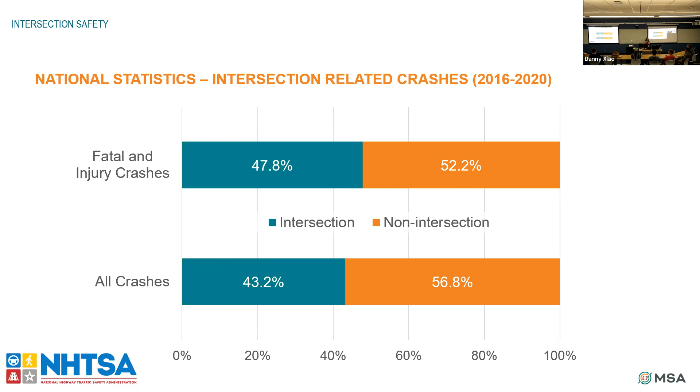A few more national statistics here. We have intersection-related crashes. So about 50% of the crashes that we experience across the nation, this is from 2016 to 2020, are fatal and injury crashes occurring at intersections. And just under 50% of all crashes that happen in the US are intersection-related. So being able to improve our intersections is a great way to reduce those fatal crashes.

Taking a brief look at traffic signals, on average, over 10,000 people are killed or injured at traffic signals each year. And there was a AAA report completed relatively recently that analyzed red light running at traffic signals in particular. In 2017, they identified 939 people that were killed across the nation just related to red light running. So you can see that that's one of the major issues with a traffic signal and why we look to try to install roundabouts when we can. The AAA is highly supportive of roundabouts because of their proven safety.

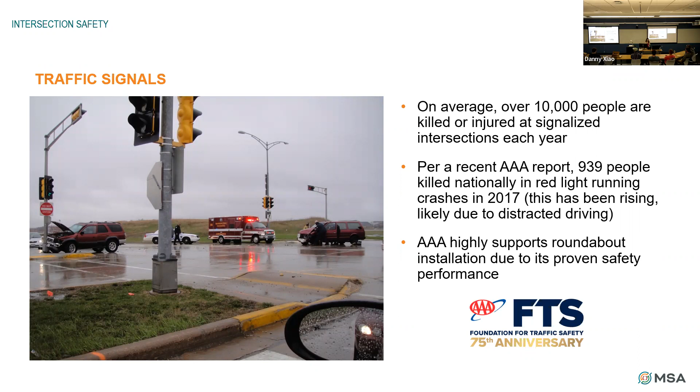So taking a look at how roundabouts are able to reduce crashes across the US. In 2001, there was a study by the IIHS, one of the original crash reduction studies for roundabouts within the nation. That study identified that crashes overall were decreased about 39% when an intersection that was previously stop controlled or traffic signal controlled was replaced with a roundabout. And similarly, fatal crashes reduced 90% at intersections that were converted to roundabouts. So those are really impressive results, and that's really what led the push to install roundabouts across our communities today.

Wisconsin is a national leader in roundabout installation. If you've spent any time driving around Wisconsin, I see some heads nodding, you've probably run into roundabouts, especially in the Green Bay area. I was driving around there not that long ago, and I felt like everywhere I was going through a roundabout, and that was really exciting to me.

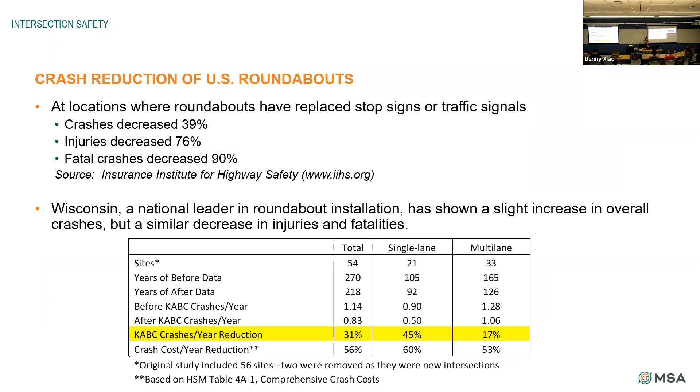So we've been studying our roundabouts for a long time in Wisconsin, and a recent study looked at the reduction of KABC crashes, so that's your fatal and your injury crashes. ABC are just the different severities of those injury crashes. Of the 54 sites studied in this table on the screen, overall crashes reduced by 31%. For single lane roundabouts, those were reduced by 45%. So we are seeing similar results to what that national study in 2001 was reporting, and roundabouts continue to reduce those crashes.

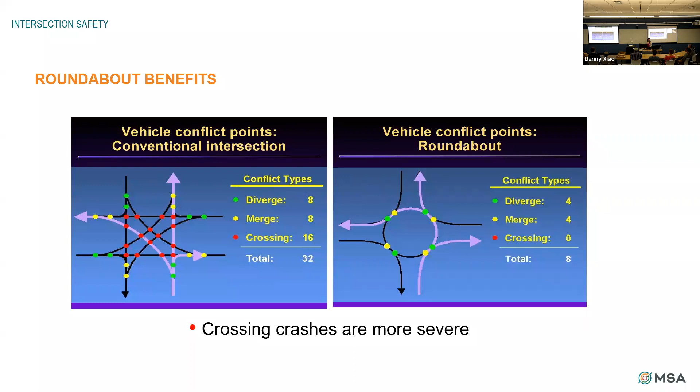So some of the benefits of roundabouts: they are the safest type of at-grade intersection. I mentioned the side swipe crashes; the angle of conflict between the traffic that's circulating and the traffic that's entering is a side swipe that's less severe. You have a little slower speed at roundabouts, just the physical geometry of a roundabout, the splitter island or median as you're approaching the intersection and the central island in the middle that directs drivers and forces them into certain patterns, and it requires them to slow down in order to negotiate those curves.

You also have simplified decision-making at a roundabout. So when you come up to the entry, all you need to do is look to the left to determine whether or not it is safe to enter the intersection. And that's in contrast to a lot of other types of intersections where you need to look across the intersection and to your right, make sure that nobody else is coming. All you need to do at a roundabout is look to your left.

They have very high capacity, often very similar to traffic signal intersections, sometimes even more capacity than traffic signals in some situations. They're also suitable for areas where you have a lot of high traffic or low traffic, especially intersections that have fluctuating flows. So say like next to a school, where you have really high peak periods in the morning when all the kids are coming to school, and then in the afternoon when all the kids are getting out of school. A roundabout can do a really good job of accommodating those high flows during those peak times.

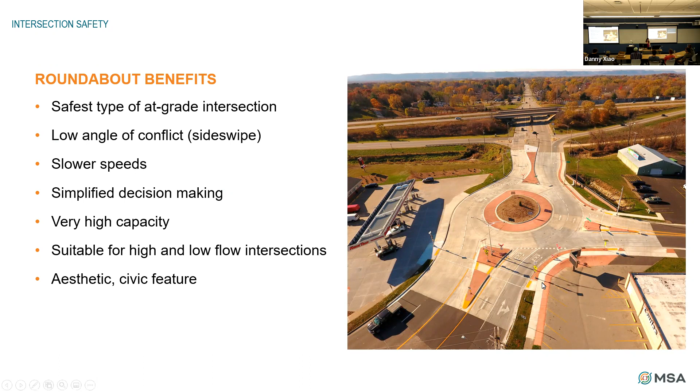All right, so a little bit about what a modern roundabout is and what it isn't, and a history lesson. So isn't a roundabout just another traffic circle? Well, as I listen to my Google Maps telling me how to get here today, even though I know how, I just have it on just in case, I go through a roundabout and it says, as you approach the traffic circle, take the second exit. No, it's not a traffic circle, it's a roundabout. So I'd like for you to all know that a roundabout is a type of circular intersection, but a roundabout is not a traffic circle.

So we have other types of circular intersections. You may have heard of traffic circles or rotaries, or neighborhood traffic circles. We'll talk a little bit more about traffic circles and rotaries in the next few slides. A neighborhood traffic circle, you might have seen in a residential community where they just pop a circle in the middle of one of the intersections, but it doesn't have a lot of the features of a roundabout.

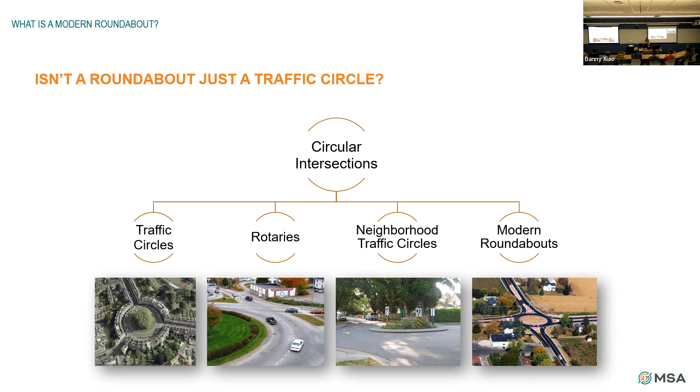So traffic circles. Traffic circles are large. They were often developed as a civic feature, something to have in the central island to represent the community and attract people into the central island to take a look at what's going on in there. It's really a ring of a series of intersections, a circle with a bunch of intersections around it. And when you enter the circle, you're facing the central island perpendicular to the circle. It's basically a right angle, and then you wait for a gap in order to enter. The series of intersections around that circle might be yield controlled, they might be stop controlled; it varies depending on location.

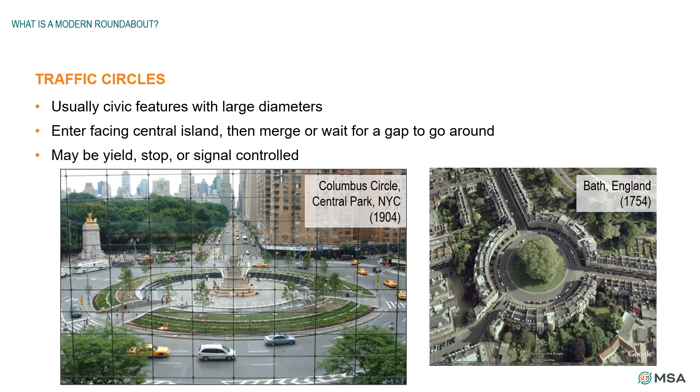But these have been around for a really long time. So I have two examples on the screen here. Columbus Circle is by Central Park in New York City. The configuration that it's in right now was introduced in 1904. The concept for it was actually even older than that. And then there's an example from Bath, England from the 1700s. So these have been around for a long time, and we've progressed since then.

So in the early 1900s, the US didn't have yield signs. That wasn't invented yet. So when you came up to an uncontrolled intersection, it was first in. So whoever gets there first is the one that wins, and the other people then just have to wait for that. And you can imagine that that would get pretty chaotic pretty quickly.

So shortly after that, they introduced the yield to right law. And this is something that you probably encountered in driver's ed, where if you come up to an intersection at the same time as somebody else, you yield to the person that's on your right. Okay, well, that makes sense.

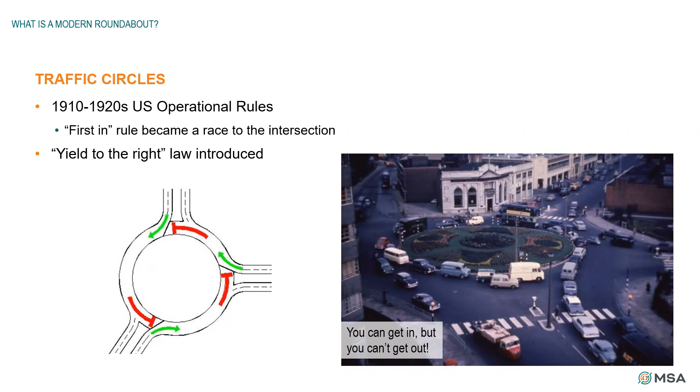But in a situation where you don't have a traffic control and you have a signal or a roundabout like this or a traffic circle like this, if you both come up to that intersection within the traffic circle at the same time, the people in the circulatory roadway would stop and yield to the person on their right. So that means that the entering drivers got priority, and then all of a sudden you get a lockup at your intersection. So you can get in, but you can't get out. So that didn't last very long either.

In the 1930s and the 50s, the US developed and implemented what they call the rotary. So the rotary is where, instead of having those right angles where you enter the intersection, now you're merging into the intersection. And you're merging into the intersection at speed. So some of these could be 35, 40, 50 miles an hour. And the way that the capacity for these was determined was based on how long your weaving section was. So the distance from where you enter to where you exit would identify the capacity of that intersection.

Well, if you needed a lot of capacity, you needed that length to be really long. So then you needed to make the circle bigger so that you could separate out those entries and exits. And this just led to really large layouts. And when you're in the middle of the circle, if they have two lanes, the very inside lane, you can't get out. You have to make a lane change in order to get out. So you have a lot of high speeds, you have a lot of weaving going in and out at these types of intersections, and that led to a mess too.

So the last reference that we have to rotaries in our design guidelines was in 1965. And then by the mid 1990s, most of these rotaries were removed and they were replaced with modern roundabouts. So here you can see the size comparison with what a modern roundabout would look like at this intersection.

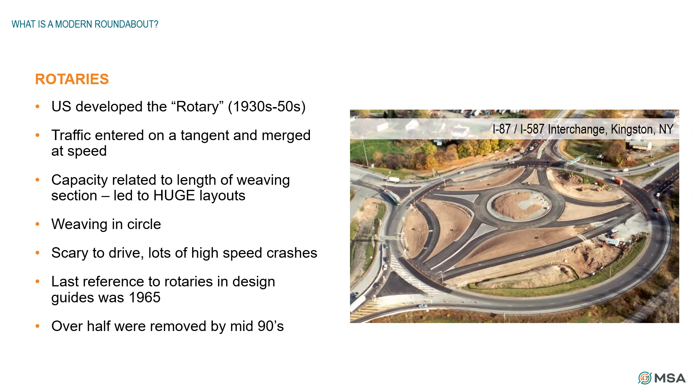All right, so by 1939, there was a police officer in Tulsa, Oklahoma, police officer Clinton Riggs. And he was getting tired of writing tickets to people that were just almost stopping at an intersection, but not quite stopping. And he thought, well, maybe we need to tell these people to yield. So he invented the first yield sign. And he installed this yield sign in 1950 at an intersection in Tulsa that was having problems. And his problems went away. It made it so much better with installing this yield sign.

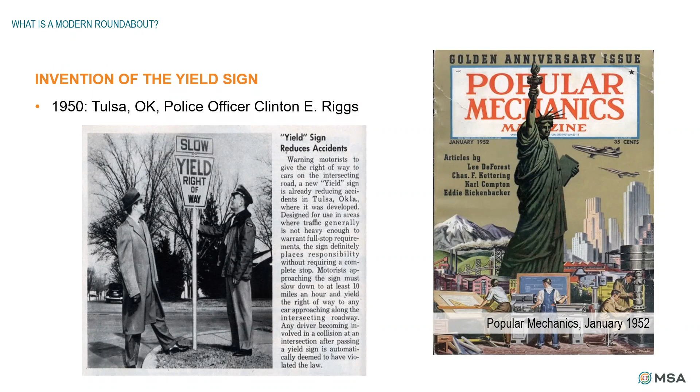And it wasn't long after that that the MUTCD adopted the yield sign as a standard method of traffic control. MUTCD, Manual on Uniform Traffic Control Devices, there's the acronym. And then it was also adopted in the UK, and the UK started installing yield signs at their roundabouts. And they realized that their congestion went away. So all the lockups from traffic circles and rotaries went away once they introduced the yield control at their roundabouts. And they saw increased capacity, reduced delays for the drivers, and injuries were reduced by almost 40%. So this is really what led the way to modern roundabouts, the invention of the yield sign.

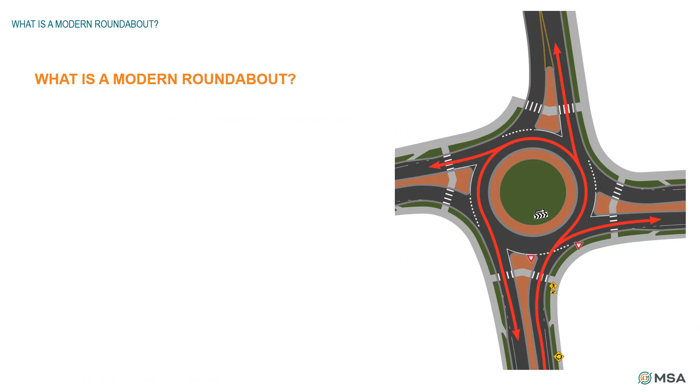So let's take a look at what a modern roundabout is, now that we know what it's not. And I think you know most of these things already, but we'll go through it anyway. So a modern roundabout is a compact circular intersection. Traffic goes counterclockwise around the central island. Entering traffic yields. The approaches are channelized in order to deflect traffic and go on a prescribed path. This is what leads to our speed control of the roundabout, this deflection, requiring the drivers to maneuver around the splitter islands and the central island.

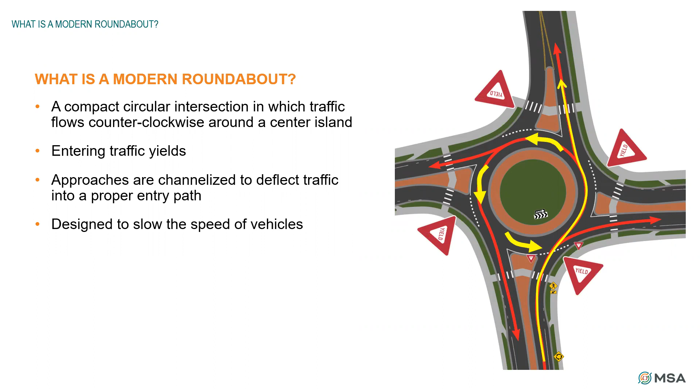And they're simple for drivers. They're simple for pedestrians. Like I said earlier, for drivers, you're only looking to the left to decide whether or not it's safe to enter the intersection. For pedestrians, with the use of the splitter island in the middle, you can cross each leg in 2 separate stages. Modern roundabouts are generally low maintenance. Now, if you have some landscaping in the middle, that might change a little bit, but you don't have the maintenance associated with traffic signal lights. And these are really the safest types of intersections, especially when you're looking at high-speed intersections.

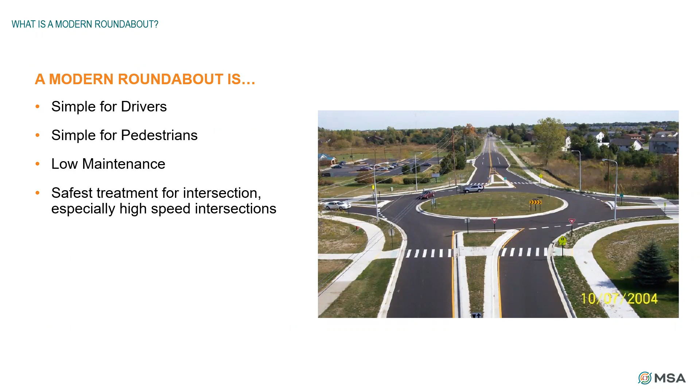Modern roundabouts can be installed in all types of locations, and they can have all different types of sizes and configurations. Here's just a few examples of some of the different types of roundabouts that you might encounter. You might encounter corridor roundabouts or roundabouts at an interchange, which is the one at the top of the screen there. You might encounter roundabouts in rural locations, urban locations, single lane, multi-lane. We have compact roundabouts, which is the picture on the right of the screen.

You have intersections that are closely spaced or have a lot of legs or look really confusing and chaotic, and they can all come together and be a peanut-about or octopus or whatever you want to call it. You can even have roundabouts in areas where you have transit or light rail. The picture at the bottom of the screen is in Phoenix, Arizona, and this is one where there's light rail that goes through the middle of the roundabout. So they really have a lot of applications.

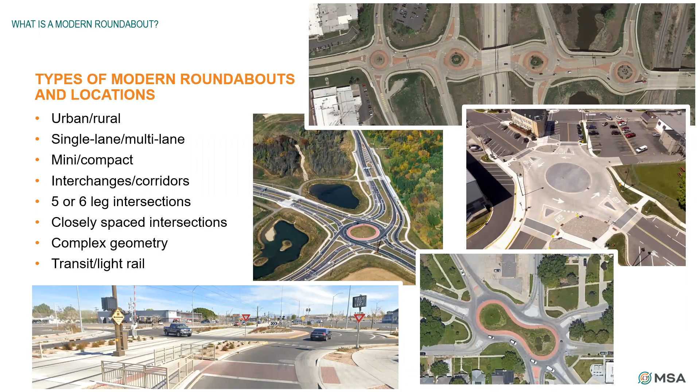But now that we know a little bit more about roundabouts, I'd like to talk about the safety models. That's what I want to focus on for the rest of this presentation. And there's two main safety models that we look at. We look at crash modification factors and we look at safety performance functions. So first, a crash modification factor is an estimate of the change in crashes associated with applying a safety treatment or a countermeasure.

So if you have, let's just say, an intersection and you want to change something about it to make it more safe, that would be a countermeasure, and you can study places across the country that have done this, look at before and after crashes, and identify the amount of reduction in crashes that you would anticipate by installing that type of countermeasure. So if your crash modification factor is less than 1, your countermeasure has the potential to reduce the number of crashes at your intersection. And if your crash modification factor is greater than 1, your countermeasure has the potential to increase crashes at that location. And if you do 1 minus that, then you can understand the percent reduction in crashes.

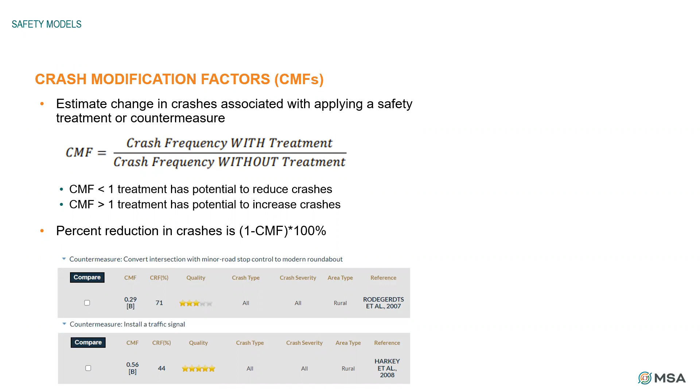But if you have a little bit more information about your intersection, you can get some more numbers out of it. So let's say you know the crash history for that intersection. For the past 5 years, that intersection has experienced 10.4 crashes per year. You can apply your CMFs to that 10.4 crashes per year and understand how many crashes you would estimate to have at that intersection after you've installed a roundabout or after you've installed a traffic signal.

So 10.4 crashes times your CMF for converting to a roundabout of 0.29, that gets you 3 crashes per year estimated for a roundabout. Or if you estimate for the traffic signal, you would have 5.8 crashes. So this is a simple way that we can look at intersections and identify the reduction in crashes anticipated with that. And this is the methodology that we had for a long time.

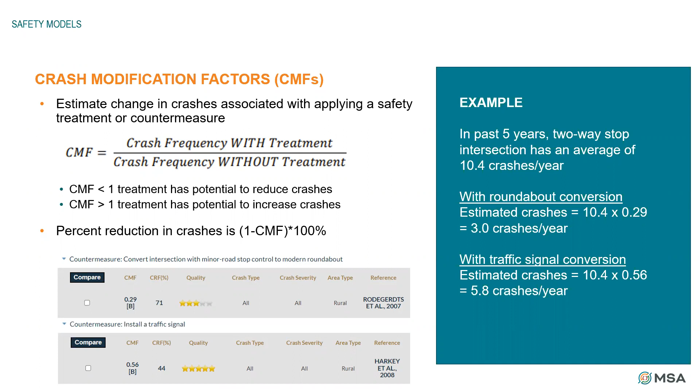And then more recently, we have developed a more sophisticated model. And that more sophisticated model is the safety performance function. And what a safety performance function is, it's an equation that helps you predict the average number of crashes per year at your site based on your site's characteristics. We have SPFs for roadway segments, and we have SPFs for intersections. And the most recent addition to SPFs are for roundabouts. So that happened within the last 5 years or so.

And this is a national study. The CMFs also are all national studies. And we have SPFs that we can use to help predict the number of fatal crashes, the number of injury crashes, and the number of property damage only crashes. And I've included the base equation for a safety performance function here. And there's several different variables in here, but what I'll draw your attention to is AADT is a variable. So AADT is your average annual daily traffic that's entering the intersection.

And that would make sense that the number of crashes at your intersection is going to be related to how much traffic you have at the intersection. And then the other variable that I want to draw your attention to is all the X's there at the end.

Oops, it's a little quiet, so maybe double it up. Excellent, there we go. Sorry, thank you. Is that better on Zoom? I hope it is. I'm talking about as loud as I can here.

All right. So the X's in here are your site characteristics. So those are things that could be the number of lanes related to your intersection, the type of control that it is, whether or not,

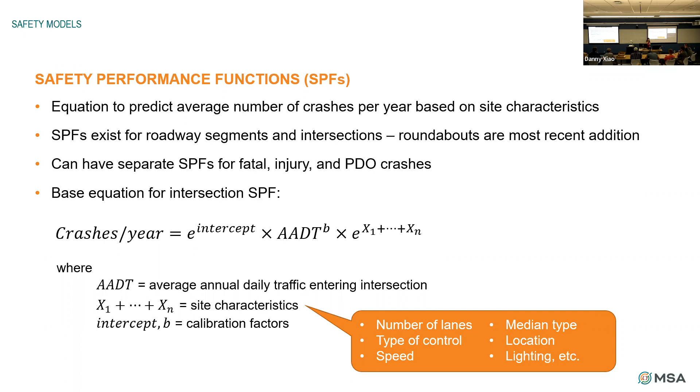All right, so at the same time that the national level was developing these safety performance functions, WisDOT was looking at their roundabouts and looking to develop their own safety performance functions. So here's a little bit about the roundabouts in Wisconsin. They have, as of May of last year, 440 roundabouts within the state, 256 of them on the state highway system and 184 on local roadways.

And the state maintains an inventory of all of these roundabouts, and they store all types of information in this inventory. Things like the number of entering lanes or the number of circulating lanes, how many legs the intersection has, how it accommodates trucks, when it was opened, rural, urban, and several more attributes too. And this is something that they maintain in-house and they update annually.

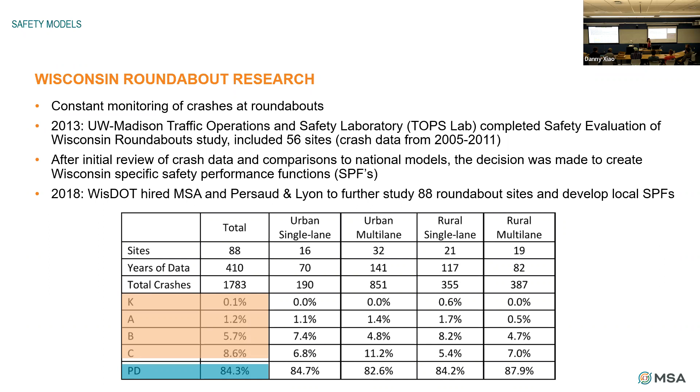So the safety performance functions that were developed initially started out with 5. We had safety performance functions that were for urban roundabouts, rural roundabouts, interchanges, single lane roundabouts, and multi-lane roundabouts. And after these safety performance functions were evaluated further, with some statistical analysis, we decided that single lane SPFs and multi-lane SPFs were what we were going to move forward with at this time. And so then we further developed individual safety performance functions for those categories, including the total number of crashes, the KABC crashes, and the PDO crashes.

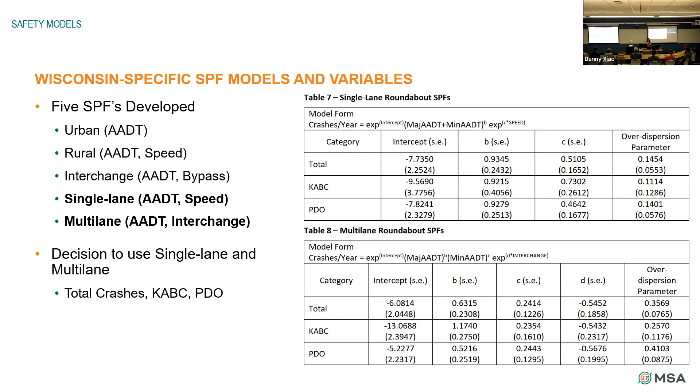So you can see in the table here, the form of the model is the same as what we looked at earlier. And then up here where all those X's were in the equation before, we now have speed as a variable for the single lane roundabout. And we have whether or not the roundabout is part of an interchange as a variable for the multi-lane roundabouts. So those were the site characteristics that were identified as being most critical to our roundabouts and what is incorporated into the safety performance functions for the Wisconsin roundabouts.

So now we have all these safety performance functions, and what are we going to do with them? So two things. First thing, intersection control evaluation. Intersection control evaluation, here's where you have an intersection and it has some problem. Maybe it has poor traffic operations. Maybe it has a safety issue. You've got a lot of crashes there. Maybe it's a really confusing intersection and people don't know how to drive it. Maybe you have a new development coming in and you have more traffic that's going to be coming to that intersection and you need to determine whether or not that existing intersection can still handle that additional traffic. For whatever reason, you have a problem. So now you need to figure out how you're going to solve it.

And what an intersection control evaluation does is it develops a standard and transparent methodology to document your decision making. So you can't just say, oh, well, I'm going to install a roundabout here. You need to have a way for the public to understand why you made those decisions and to justify your decision. So that's where this intersection control evaluation, or ICE, comes into play. You start looking at all your viable alternatives, both for the type of traffic control and the geometry of the intersection, and document that process.

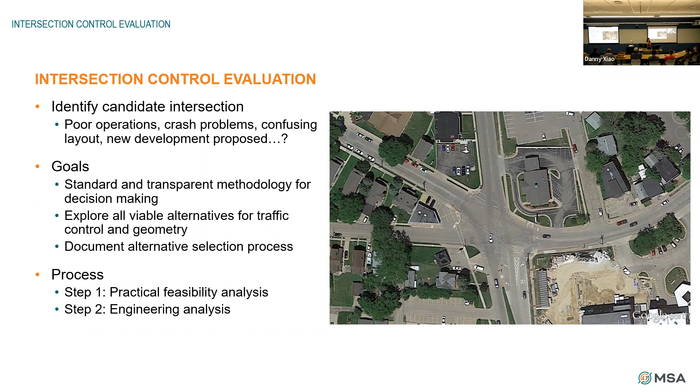And the process is usually two steps. The first one would be practical feasibility, where you brainstorm all the different types of options that you can come up with, and then whittle them down and identify which ones are most practical to bring forward. And then once you have those identified, you'd move on to step two, which is the engineering analysis. And the introduction of roundabouts as an option for an intersection is what really prompted this intersection control evaluation methodology, because roundabouts weren't real popular at the beginning, and we needed to be able to justify why we were putting them in and have a transparent method to document that.

You have to meet warrants in order to install a traffic signal. So you go through these high-level reviews of these options and decide which ones you're going to bring forward. If you have an at-grade intersection, you're probably not putting in an interchange. So then you can rule out all the interchange-related options and focus more on the at-grade intersections. Or if you have an at-grade intersection or a grade-separated intersection, you might not be looking at individual types of intersections. So that's how you start whittling these down.

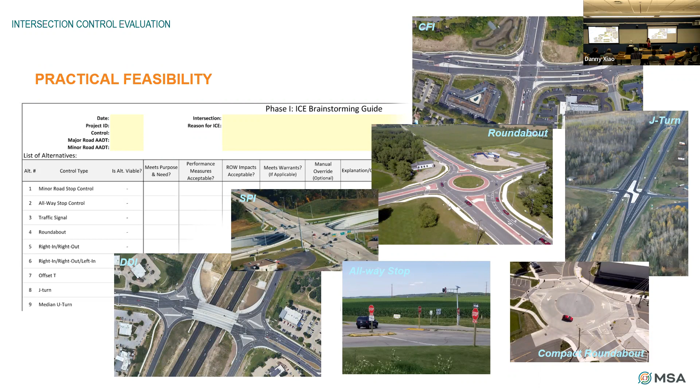And then once you've identified what your alternatives are that you're going to move forward, you would go ahead and get down into the numbers a little bit more and do your engineering analysis. You would draw concept sketches for your alternatives. You'd start looking at the quantitative items, your operations, your costs, and your safety.

And then also looking at qualitative items, things like your environmental impacts, how well they accommodate pedestrians and bicyclists, how you're going to construct it. Does it have speed control? Does it accommodate the design vehicles that you need to accommodate? Those are all the things that you look at once you whittle down to your few alternatives that you're looking at.

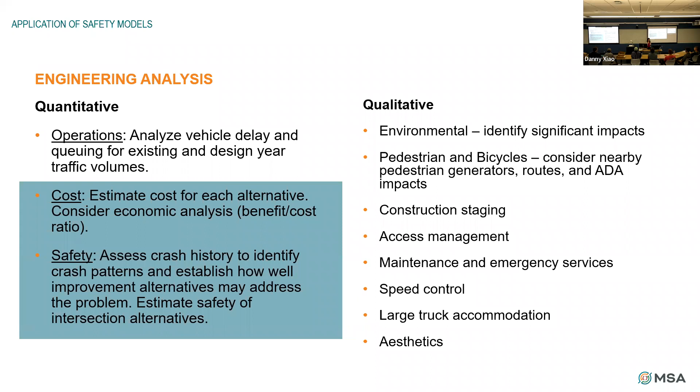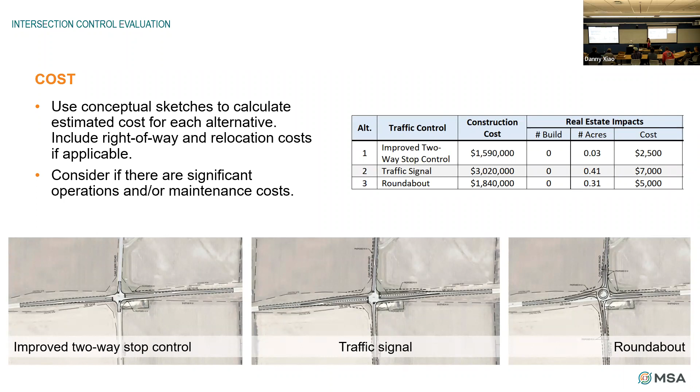So I'm going to talk a little bit more about cost and safety. So first, cost. I mentioned that at this point in time, you would have sketched your intersection. So now you can estimate the materials that you would have for that and what your cost might be, and whether or not you have some significant right-of-way issues or impacts, and that would be built into your cost as well. So for this particular project, we were reviewing an improvement to the existing two-way stop controlled intersection, a traffic signal, and a roundabout, and we developed construction costs for those alternatives.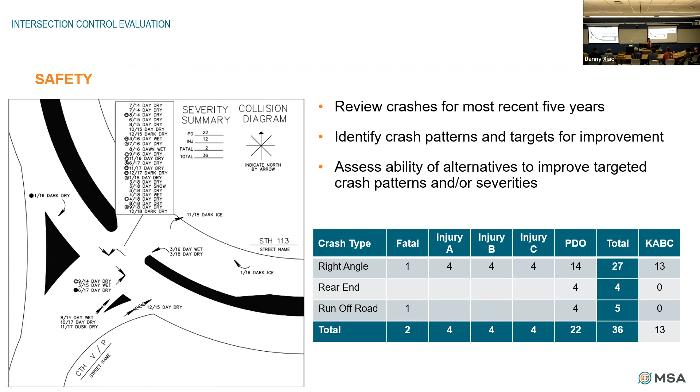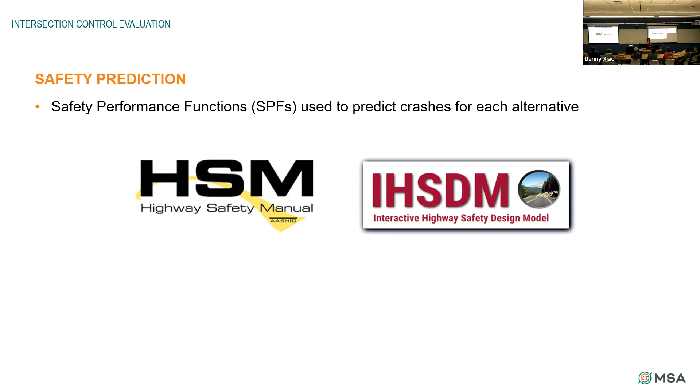And then we can look at the safety prediction. So this is where the Wisconsin specific safety performance functions that were recently developed come into play. There's something called the Highway Safety Manual, and it has methodologies prescribed on how to do a safety analysis. And you can work through all of that by hand, or you can go to the software program, the IHSDM, which is the Interactive Highway Safety Design Model. You plug in your characteristics and you have your safety performance functions within there, and it can help you calculate what your predicted safety performance is.

And then once you have all that information, you can put it together. And this is another way to help really identify what types of intersection improvements are going to benefit you the most. You can look at a benefit cost evaluation. So you've used your safety performance functions to identify the predicted number of crashes with your alternatives that you've identified.

You have crash costs that are associated with all the different types of crashes, and that's what this table is here. WisDOT has identified the value for a fatal crash at about $13 million. And then as the severity of the crash decreases, the value of that crash cost decreases, and property damage only crashes right now are valued at $16,000. So if you have your predicted number of crashes, you can factor this crash cost into that predicted number of crashes and identify what your crash cost is for that intersection.

And then you also have your construction cost. So you can use that to identify what your benefit cost ratio is. And generally, benefit cost ratios that are greater than 1 are considered good improvements and things to be considered further. In this particular example down here, we have a traffic signal and we have a roundabout. The benefit cost ratio for the traffic signal was 0.8, and for the roundabout was 1.5.

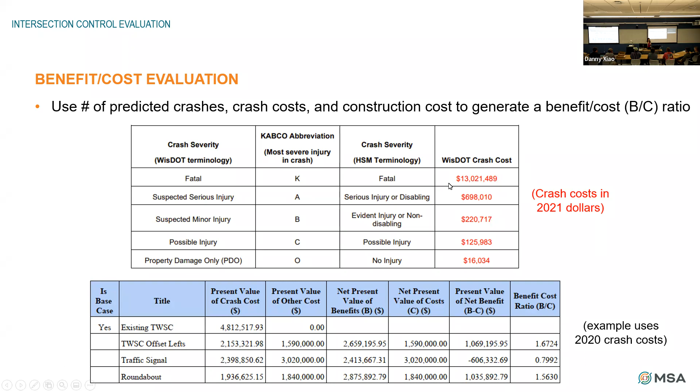So the roundabout has a higher benefit cost ratio, one, because it has a lower construction cost. You can see the construction cost here. And two, because it's really helping to reduce those really severe and fatal crashes. So when your roundabouts essentially eliminate your K and A crashes, that's a big benefit to you with the cost.

All right, so now the second application for these safety performance functions is taking a look at roundabouts that are in service, that are operating today, and seeing how well they are doing in terms of safety. And we call that network screening and in-service reviews.

So I mentioned earlier a 2013 study by the UW-Madison TOPS lab, and they were looking at 56 sites. And the safety performance functions were not developed at that time. So they were using before and after studies in order to identify locations that looked like they might be having some problems or underperforming. So there were 10 sites that were identified within that study as underperforming roundabouts.

And then what we were able to do with the 2018 study is take the safety performance functions that were developed for Wisconsin and compare that to those 10 sites and the predicted number of crashes at each of those locations, and identify sites that had potential for safety improvement. So I'm going to walk you through potential for safety improvement.

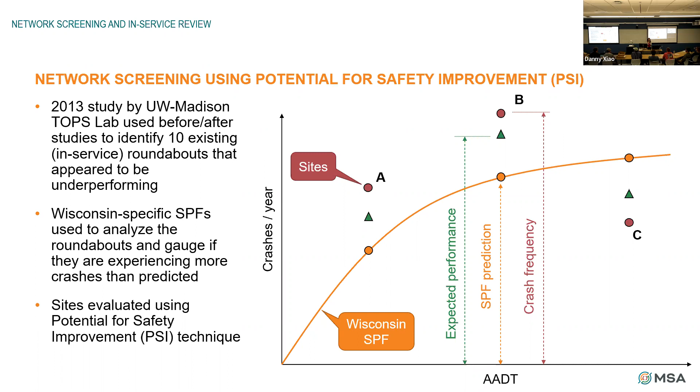And your expected performance is always going to be in between your crash history, the red dot, and your predicted number of crashes, your orange dot. So it takes into account both the predictions for that intersection and the past history for that intersection to identify the expected performance. And then the difference between your expected performance and your predicted number of crashes is your potential for safety improvement.

So an intersection that has a high potential for safety improvement, or a high PSI, that means that the number of crashes that we're seeing at that intersection are a lot more than what we would have predicted and expected, and maybe there's some room for improvement there.

There also could be sites that have a negative PSI. So these sites would be ones that are experiencing less crashes than what we would have expected at that particular location. And so that would indicate to us that, well, maybe we don't need to look at that site further right now. Our money is better spent on looking at something that has a positive PSI.

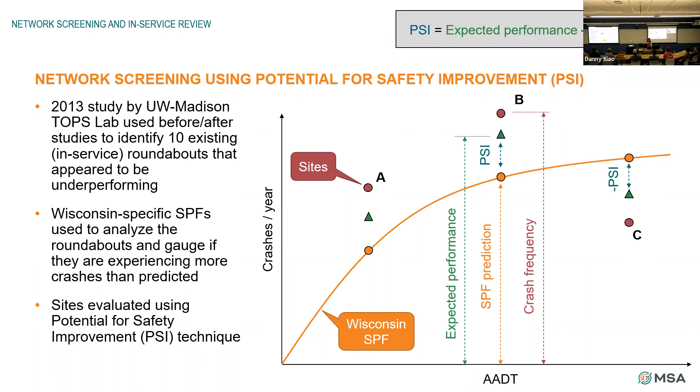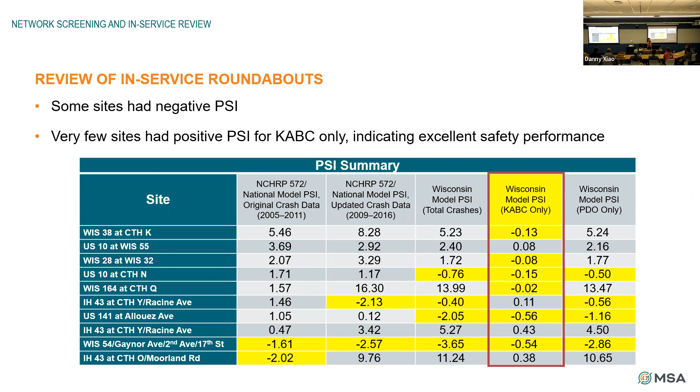So again, these 10 sites that were identified originally based on before and after studies, once we take a closer look at it with these safety performance functions, we realize that most of these are doing better than other roundabouts within the state at this point with the negative values. So there's only 4 sites here that registered as a potential for safety improvement. And even those numbers there are pretty low. So that's saying that these roundabouts are generally doing really well.

But we have identified some sites that have potential for safety improvement. So now we can do what's considered an in-service review. We can look at those sites a little bit closer and identify what the problems are and how we could potentially fix it. So when reviewing all of the sites, we found some common issues. One of the issues was failure to yield, especially at multi-lane roundabouts. That's where you're sitting at the entry and you have 2 lanes coming in front of you, and a lot of people don't yield to the person on the inside lane. That's a common crash type at a multi-lane roundabout.

We also had a common issue of speeds being too fast on the approach. So that leads to loss of control crashes. Somebody's coming flying down here and they can't negotiate the curves and they have a single vehicle crash off the road. So the speeds are just too fast. Drivers aren't slowing down enough for that. And another common issue was the use of super elevation on the approach curves. And that could be part of the reason why the speeds are too fast.

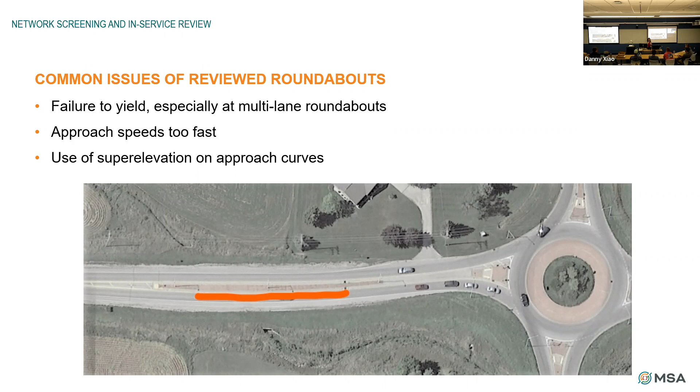So at this site here, I have this curve highlighted. If you think of being on a racetrack or you watch racing on TV, they go around a circular track, and the corners are banked really steeply, and that allows the cars to go around that bank really fast. And that's what super elevation is. So if we super elevate this curve, that only encourages drivers to drive that curve faster. And we don't want that. As they're approaching the intersection, we want them to slow down. So that's one of the problems we've seen at some of the intersections that have too fast approach speeds, is that curve is super elevated and we really don't want it to be.

So we've identified some countermeasures that could be implemented at roundabouts that are seeing more crashes than what we would have expected. And they're in a couple different categories, speed and weather related factors and failure to yield factors. Some of the countermeasures for speed related or weather related factors would be installing a high friction surface treatment, which just helps the car stick to the pavement a little bit better. Installing rumble strips on your approaches in order to help the vehicles identify that there's an intersection coming up and they need to slow down. Restricting sight lines, which I'm going to spend a little bit of time talking about here. You'll notice that one is listed under failure to yield as well.

So on this diagram in the upper right here, we have an intersection, and these lines here are your sight lines. Somebody that's approaching, really all they need to be able to see is to the left, to what's happening at that upstream entry, whether or not a car is coming in, and deciding whether it's safe to enter the intersection. You don't really need to be seeing anything through here, and you don't need to see much through the central island either. You especially don't need to be seeing anything that's happening across the circle from you. So if we're having problems with speeds, one of the things we can do is actually restrict drivers' sight lines and put plants in the splitter islands or put more plantings within the central island to help block sight.

And that might seem counterintuitive, but if you can't see, hopefully your natural reaction is to slow down. So that's the idea behind this, really just directing the driver's attention to where it needs to be and not being distracted by anything else, and getting speeds to slow down. So that can help with reducing speeds, and it can also help with reducing failure to yield. Again, making the driver look only where they need to look and not be distracted by other things.

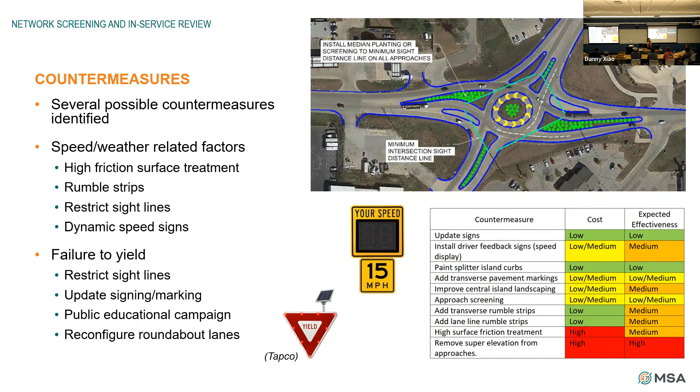All right, so we're going to put this all together now, and we're going to look at a case study. This is called an in-service review. So we have an existing roundabout, and it's experiencing some crashes. This roundabout is in Eau Claire, Wisconsin. It's just next to an interchange here, and the approach speeds on Highway 53 are high, around 50 miles an hour, 55 miles an hour, something like that. And we have a fairly rural location.

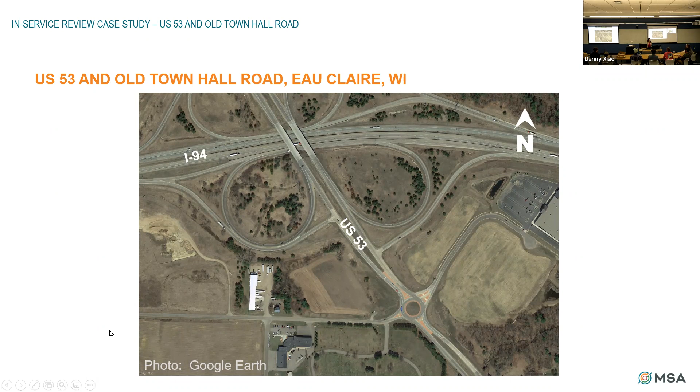So here's the crash diagram that was developed for this intersection. Crashes from 2010 to 2016. And one of the things that might stand out to you right away is that there's a lot of little squigglies on here. And all these little squiggly lines are single vehicle loss of control crashes. And in particular, there's a lot of lines over here, all pointing to this area. This is the southbound approach. This is where the interchange was over here, and then the roundabout comes in this way. So there's a lot of crashes that look like they're related to loss of control with the southbound approach.

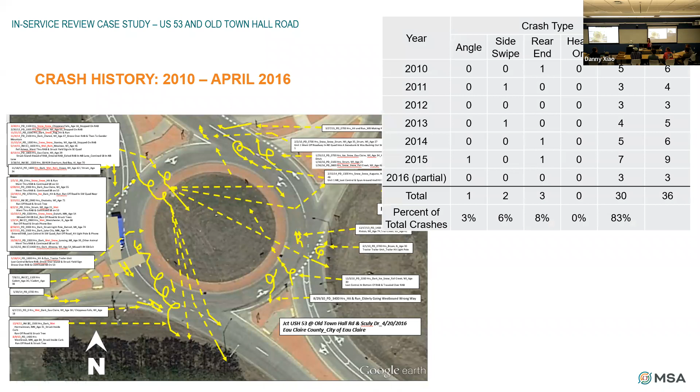So if we take this and we tabulate it, then we can get an even better idea of what's going on here. So loss of control crashes, all those squiggly lines, make up 83% of the total crashes at the intersection. So there's certainly something going on here that we should try to fix. If you take a look at the number of crashes per year for this intersection based on this crash history, it's 5.7. If you were to run that safety performance function, you would expect 2.3 crashes at this intersection. So again, another way to understand that something's going on here and we should try to solve it. And then also a little side note, that southbound direction, loss of control crashes made up 61% of the total intersection crashes.

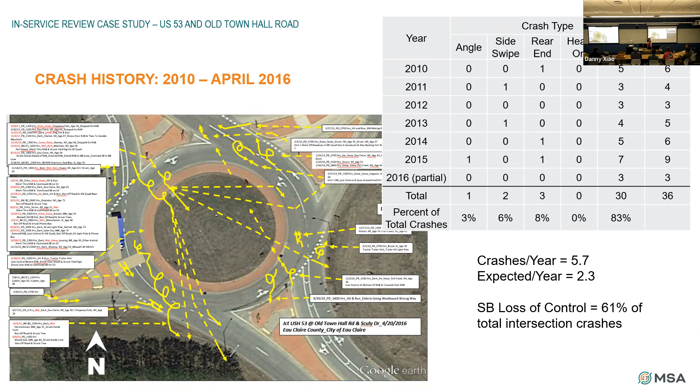So now we have an idea of what we're trying to look for and try to figure out what's causing that. And the issues that were identified here was that the southbound approach speeds were too fast. I rotated this on you, north is over here. So this is your southbound approach. And that there was too much sight at the entry.

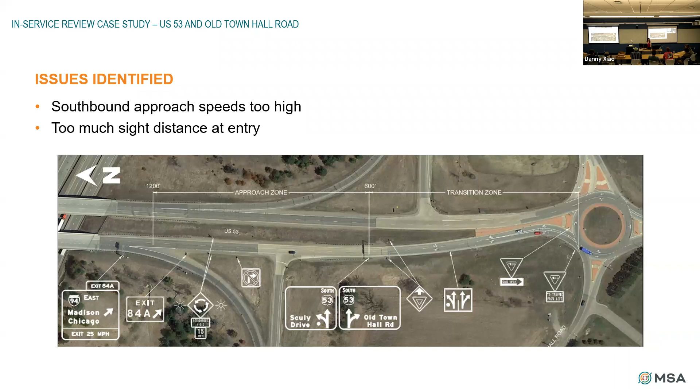So countermeasures that were identified to help counteract those crashes were, one, to mound the central island. So you can see in this picture down here, the central island is mounded. So that does two things. That helps increase the visibility of the intersection as you're approaching it, and it helps screen visibility across the intersection. So you don't need to see across, you just look to your left. So that has a twofold benefit there.

And Wisconsin, when they install their roundabouts, it's prescribed that you mound the central island like this. So all new roundabouts that are installed should have mounded central islands or landscaping in there to help screen that and increase the visibility of the intersection. Then the other countermeasure that was identified was installing rumble strips on the approaches. You can see we had 3 sets of rumble strips in here, another picture of it down here. And so most of you have probably driven through an intersection that had rumble strips approaching it.

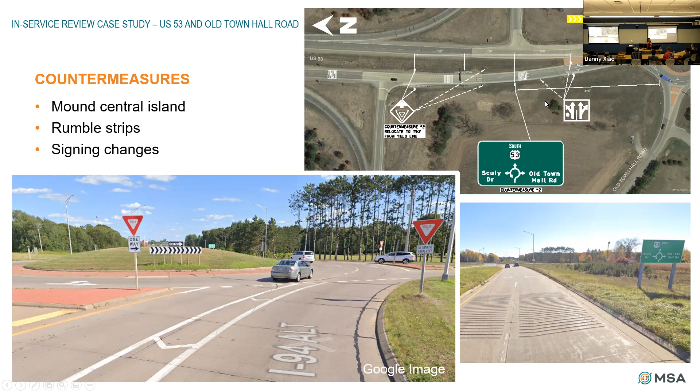You know that that forces you to slow down. And then signing changes were also identified as a countermeasure. So we have this sign here, that's the yield ahead sign that indicates to drivers that there's an intersection coming up and you're going to need to slow down. The sign was moved farther upstream so that drivers would see it sooner and hopefully identify that they needed to slow down and realize that there was something coming up. And then some signing changes were made to the lane signs as well to just reinforce what lane drivers needed to be in order to get to where they were trying to go.

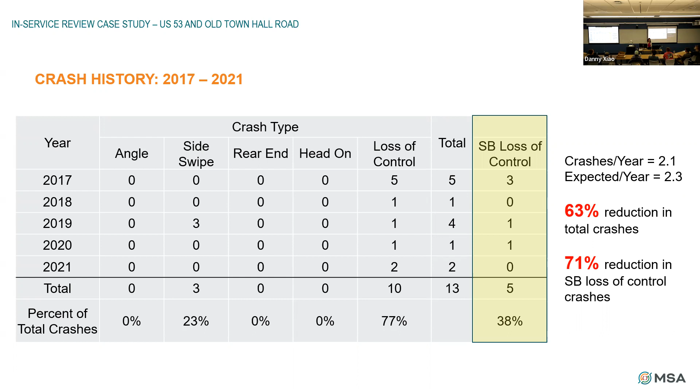All right, so just to summarize some of the things that we talked about here, reducing fatal and injury crashes at an intersection is a national goal. And it's a goal of all the states really, and Wisconsin too. And modern roundabouts are a great method to reduce driver speeds. And with the development of roundabout safety performance functions, we have an even more sophisticated model for helping us to predict the number of crashes at an intersection in the future.

And Wisconsin is really a leader in the installation and safety analysis of roundabouts. They've done a lot of research. They've developed their own capacity models and safety performance functions. And this has really allowed us to advance the future of roundabouts in the state and provide a better understanding of the performance of in-service roundabouts and roundabouts that we install moving forward.

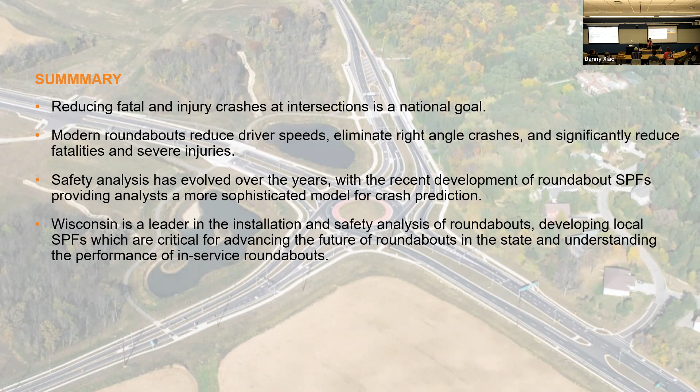Yeah. So regarding this case study, was that roundabout constructed before the countermeasure of mounding was established? Or why wasn't it implemented from the start? That's a good question. I can't tell you why it wasn't implemented to begin with. It's possible that that was not a standard at the time. Okay. But it's best practice and it's what we should be doing moving forward for sure. Yep.

Questions? I guess, do you ever think there's a possibility where the intersection's too large for any size roundabout, or how big can these roundabouts get, I guess? Yeah, we've had roundabouts with 3-lane entries and also bypass lanes. So like the picture on here, this is a bypass lane. So it's for right turning traffic. So we've had roundabouts that have had 3-lane entries and bypass lanes as well. So that's about as big as what I've seen.